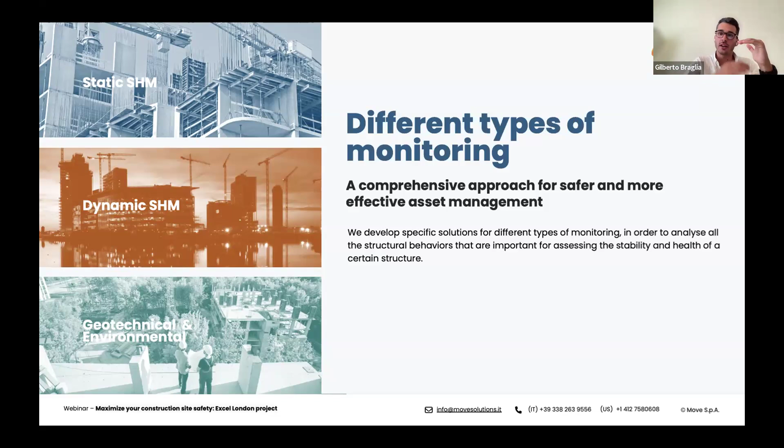which is both static and dynamic as well, and then of course we provide all the environmental monitoring as well. So air, wind measurements, rainfall and temperature, humidity, and everything around that. So we provide a full system from all the layers of monitoring to all the software for elaboration. So that's what we provide.

Let me talk a little bit about our new software, which we have developed in the last year. It is called MyMove, and it's a next step on our software, because it's not anymore just a monitoring software, but it's an asset manager. So first, it's multi-project. Every user can have several structures under him and can have a clear view of what's going on in all of its structures.

After that, we provide a layer of custom charts and custom dashboards. So every customer is free to combine different measures of different sensors together to correlate them and understand very well which parameter is influenced by another parameter. I can see acceleration over temperature, over a crack expansion, or whatever I want.

These are charts that every customer can save and create its own dashboard, and more users can work together on this and can see each other's, if it's allowed in the settings, can see the charts that the others created, and so this is a space where the users can work together.

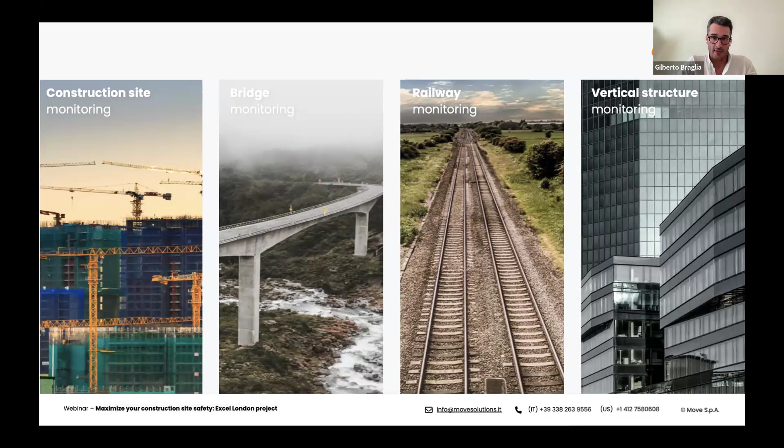We have, for example, a lot of monuments and historical buildings in Italy. We have some dams, we have some mining sites. Those are residuals. These are the ones where we have our best expertise. And today we are talking about the construction sites. So you can imagine in the construction sites, it's really important to check all the works are going well.

So we can monitor basically construction sites for buildings, for tunnels, for high rises and whatever, both in dynamic, environmental, and static ways. So we have tons of examples of what we are doing and what we can do in terms of the applications in the construction sites.

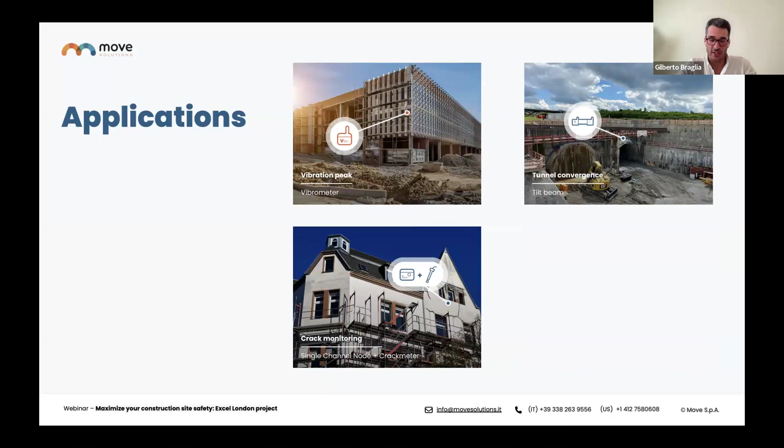Every structure is different, but basically what we developed are some layouts that can be applied to, let me say, standard buildings, and then we can customize them on the specific building and the specific working site. You can understand how much this can reduce the risks and save money.

It's not needed anymore to go on site and do, let me say, daily or weekly measurements, because you have everything automated, all the data coming on the platform. You can check, you can automate the thresholds, the alarms, whatever. And like this, of course, the downtime of the workers and of the working machines is reduced, and you can save a lot of money.

So now I'm happy to leave the floor to David, who can present himself and explain about a really nice, really important case study that we have done in London.

Thank you for the welcome, Gilberto. Much appreciated. Really good oversight into what we receive by way of products from Move Solutions. We've had a long-serving relationship and a really good partnership with them and Visualize Survey Equipment, their UK distribution partner. So by way of introduction, my name is David Mainwaring. I'm New Business Development Director for Survey Solutions in the UK.

A bit about our background. We're a UK leading engineering survey and monitoring provider. The company is over 22 years old. When I started 6 years ago, we had 90 people, and now we're up to 180 people in the organisation, and a national presence of now 10 regional offices, which makes us extremely flexible and able to act quickly and directly for our clients.

We offer a broad range of structural and monitoring solutions, including environmental solutions for our clients. And we work across a diverse range of project sectors, from MOD, construction, civil engineering, infrastructure. But the project I want to speak to you about today was the ExCeL Exhibition Centre in London.

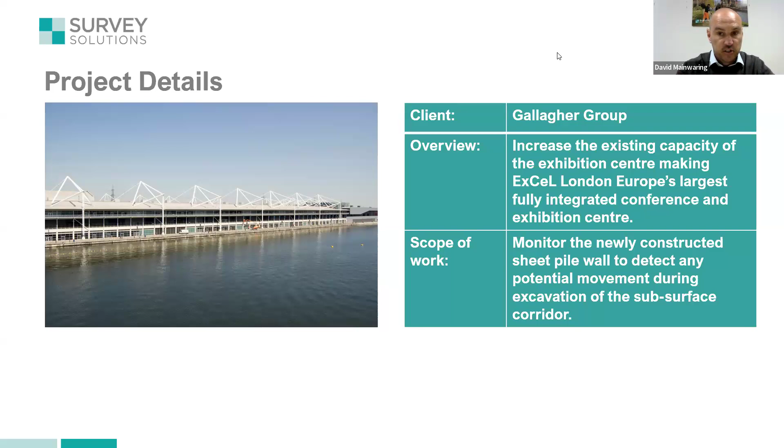So next I'm just going to show you a small video. It's only a couple of minutes long, just to give you an idea of what the project was all about.

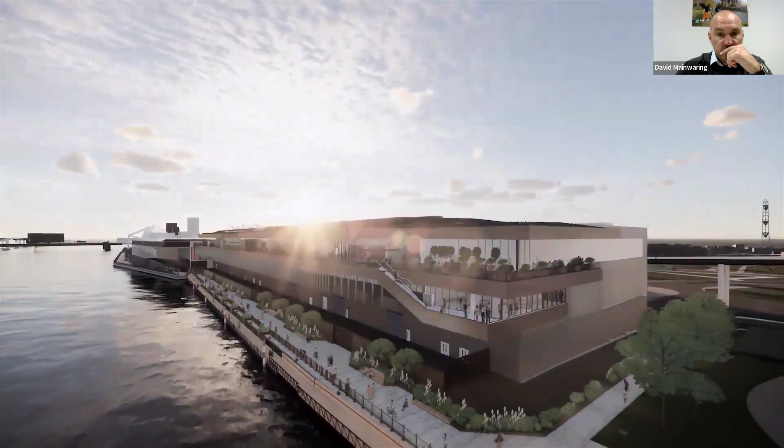So hopefully that gave you a good introduction to the project. Gallagher Group, who we were working for, the groundwork company, a long-serving client of ours, very well respected in the industry. When they gave us the specification for the project, I'll show you the numbers in a minute, we initially thought of monitoring using a fully automated total station, but because of the longitudinal nature of the project and the limited line of sight that we had, we were looking at 8 to 10 fully automated total stations at a cost over the length of the project exceeding £300,000.

So talking with the technical team at Move and Visualize in the UK as well, we devised a solution with the Move sensor solution, which I'll describe in a minute, where we could significantly reduce this cost and still give the asset holders the security that we were constantly monitoring their structure 24/7.

So by way of numbers, I'll just move my screen because I've got a picture of Gilberto straight over the top of the numbers.

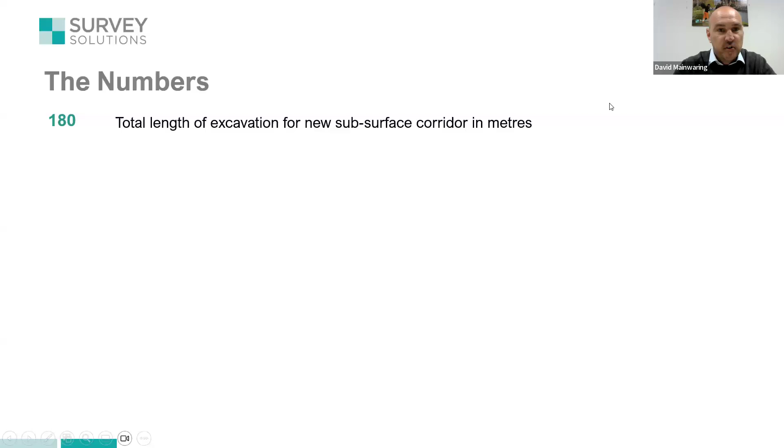180 meters was the total length of excavation of this new sub-surface corridor. 3,000 cubic meters of materials to be excavated.

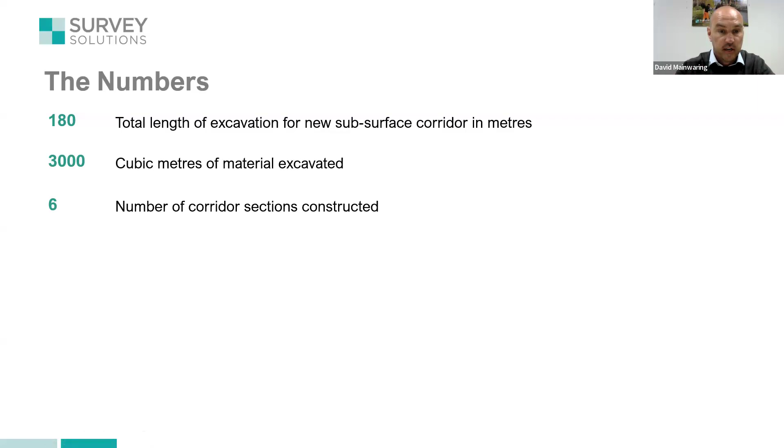The project was broken up into 6 corridors, so 6 sections as we went through the project, from the existing Excel Centre out between the 2 hotels to the east of the exhibition hall, which people who know the area will understand was a bit of derelict land. And then 48 was the total number of triaxial tilt sensors, 8 per section, that we installed throughout the duration of the project.

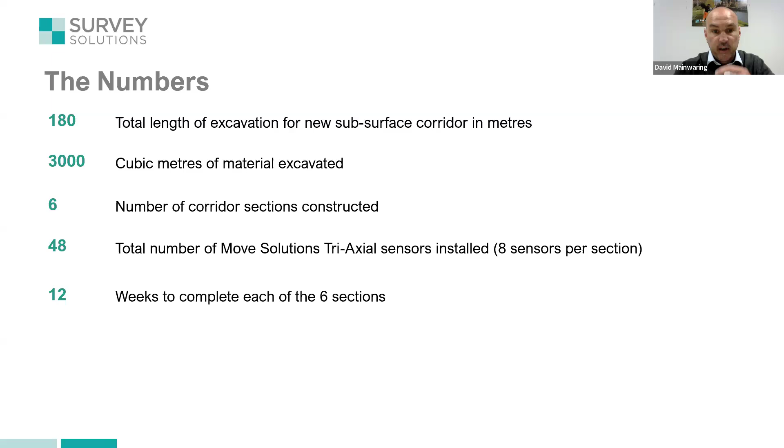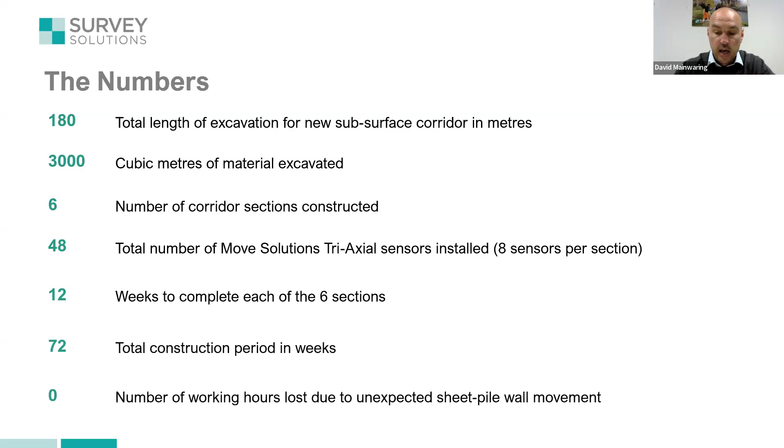12 weeks to complete each of the 6 sections, making the project just under 18 months in total. And the most important number for our clients was 0 hours, and that was the number of hours lost due to unexpected sheet pile movements, which was the most successful story of all.

So if we look at this picture here, you can see the extent of the existing Excel on the left, and the right-hand side was phased through. We've got 2 curved buildings here, a hotel, another hotel, walkways through, the Docklands Light Rail infrastructure, the existing Excel Centre. So the prime objective of our monitoring for the project was safety of the general public who were travelling between these hotels and the exhibition centre while it has been live the whole time.

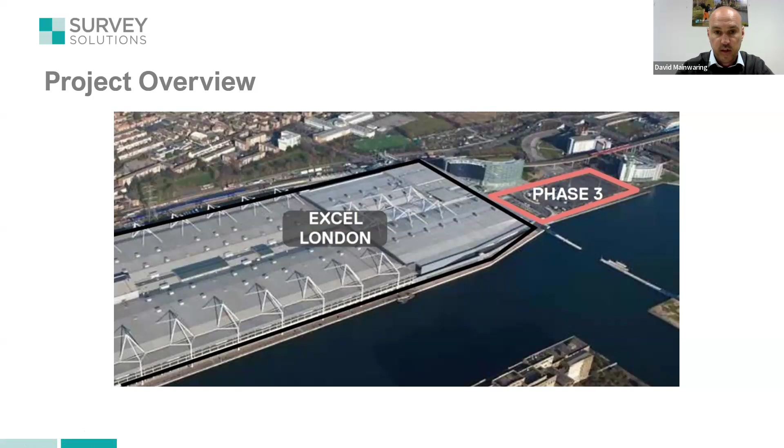The safety of the workforce that were working in the trenches. And then the third point was making sure that there was 0, or never 0, but as minimal within tolerance movement as possible, so they can continue their excavation works uninterrupted, which they did and were pleased about, obviously.

Once that was installed, they started the top part of the excavation down to about 1 meter, 1.5 meters, so that they could put in the supports and the trusses across to make sure when they excavated to the full depth of 5 meters, that the trenches were propped and the workforce could work comfortably inside.

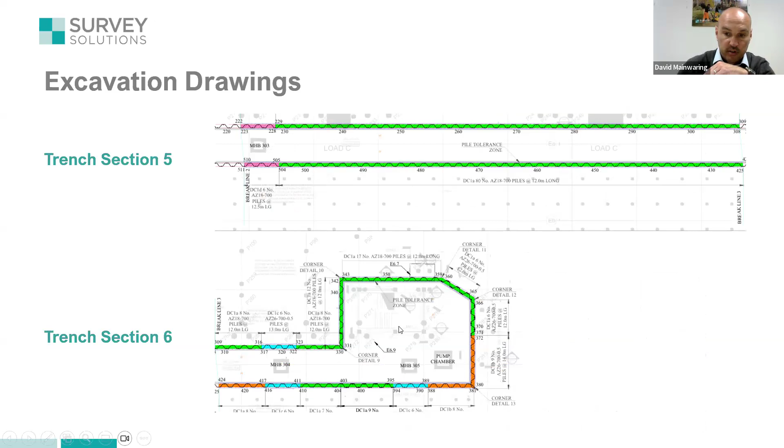And then the 5th and the 6th section was going out further east towards the hotel, where it had sort of a big ring at the end where they had stairwells, lifts as well to get through to the service areas. So I just realigned the first phase of the drawing so it sort of aligns to the drawing so you can make sense of it.

On the right-hand side here, you can see this is where it abuts to the existing east face of the Excel Centre. So the service trench should be coming through. You can see an operative in the bottom of the trenches here. And this is ultimate safety, making sure that these people are working. You can see the rebars being constructed for the pour of concrete.

The trusses were put in for the props, and you'll see in very small here, our Move Solutions triaxial tilt sensors. So these sensors, we've got a good working relationship, as I said, of several years with Move Solutions. We have in excess of 400 different sensors, but the majority being tilt sensors. So each of these have a life expectancy, the battery life, of 5 to 7 years.

So extremely economical. The only point that needed power was the communications gateway, which was housed in the Portakabins, the site offices with a 24-hour power source. They're able on the single node to pick up the LoRa communication to over 200 sensors. Like I said, there were only 48, so we only had 1 gateway. So there's 1 power source and 1 gateway through the whole of the construction.

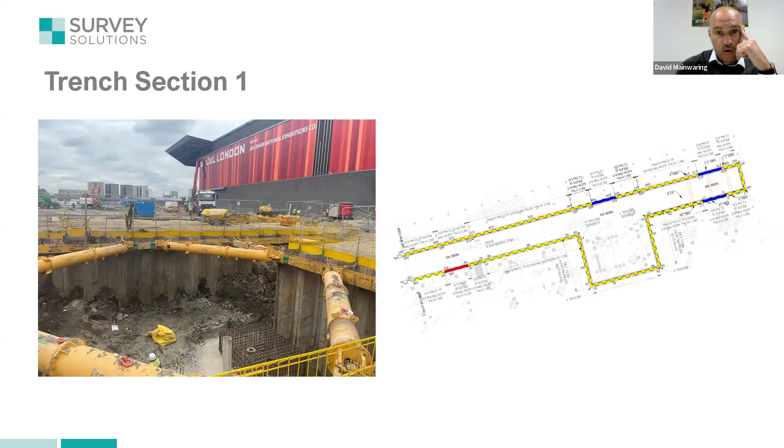Again, this is another abutment sticking out, but you can see slightly better here the tilt sensors. So 3 along here. The reason we have 3 in the rows, we can look for deformation as well. So rather than giving you just the movements, we could give you any sort of heave or settlement that's happening between the sensors. When we installed the tilt sensors, a monitoring target was put onto each one, because you may or may not be aware, but tilt sensors will just give you a movement in 3 axes. They will not give you a coordinate movement.

So it won't tell you it started at easting, northing, XXX, and then it's now moved to new coordinates. So if we do detect movement on any of the sensors that exceeds or breaches the predefined tolerances from the civil engineers, we'll then go in and resurvey them to give an absolute coordinate difference so that they can make plans and then do some temporary works or remediation works to continue.

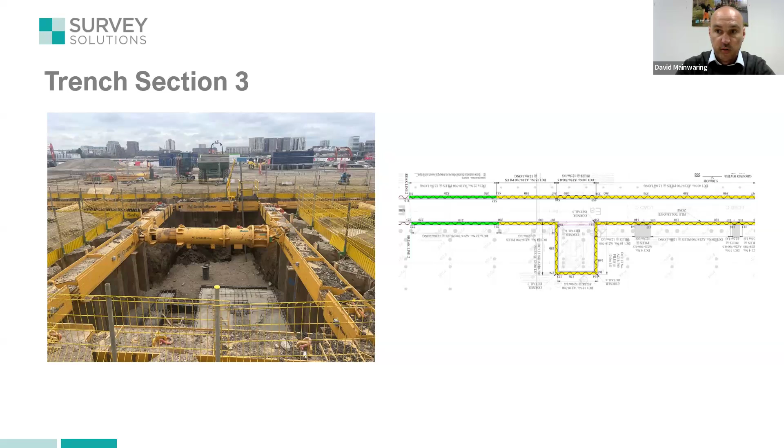But like I said, they had 0 hours down. It was just peace of mind that kept them going throughout the projects and kept everybody safe, which was their penultimate goal. There's only one temporary closure, and that was the Formula E that came through the middle of the site. Incredibly, we can see in the background there's our site offices for McLaren and Gallagher. DLR was still running live, and they held the Grand Prix there last year, which is happening again next month.

The trenches have now been finished, but you can see at the end they're coming just past. This was last July, so they're just coming past the first hotel while construction was underway, and managed to safely run a Grand Prix while the works were shut down for 10 days.

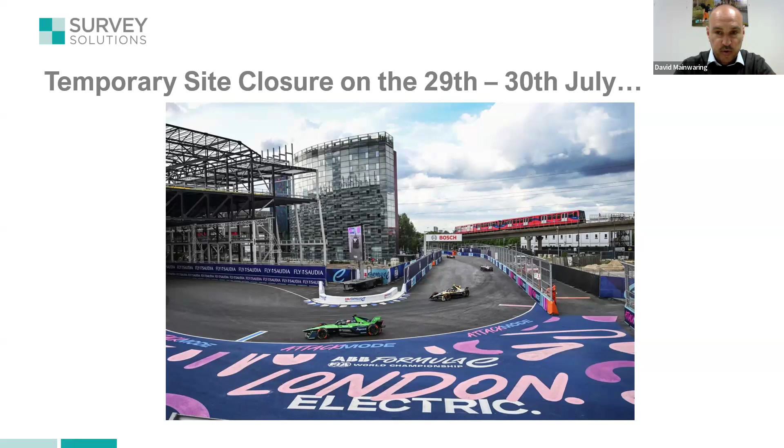And this is the current progress. So now the trench is in, the superstructure has gone up, and this picture was taken about 3 or 4 weeks ago when I visited an exhibition at the Excel Centre, and they allowed me to go up in one of their MEWPs and take a photograph of progress.

And then next week, I'm not sure how many of you will be going, but the GeoBusiness exhibition for our industry is being held at the Excel. So be sure to go out and have a look, because it's extremely impressive, and there'll be a lot more activity going on and a lot of changes to what you can see there.

So firstly, I'd like to thank Move Solutions for being a great partner with us here and being able to come up with an idea that we went back to the structural engineers and made them aware. I think it was educating the actual clients into the technologies that we can use in keeping their work sites as safe as possibly can.